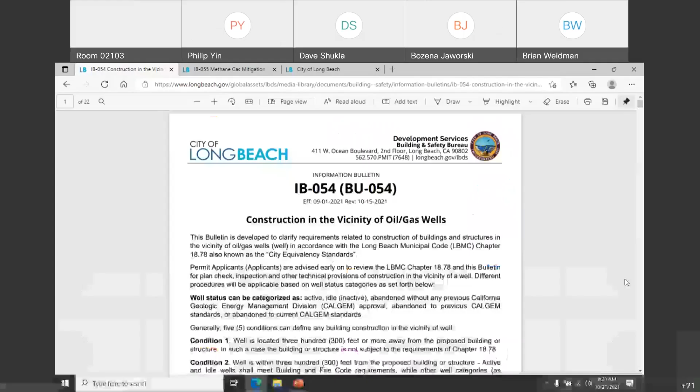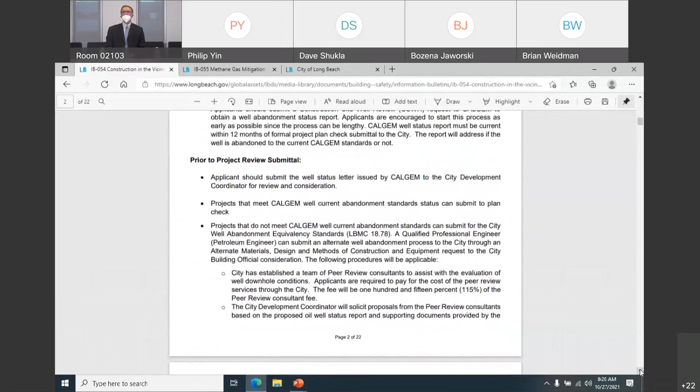For construction in the vicinity of oil wells, there is a cheat sheet, a simplified version of what the ordinance is all about. All the technical stuff that could not fit in the ordinance is detailed and put in bullet points, easy to read.

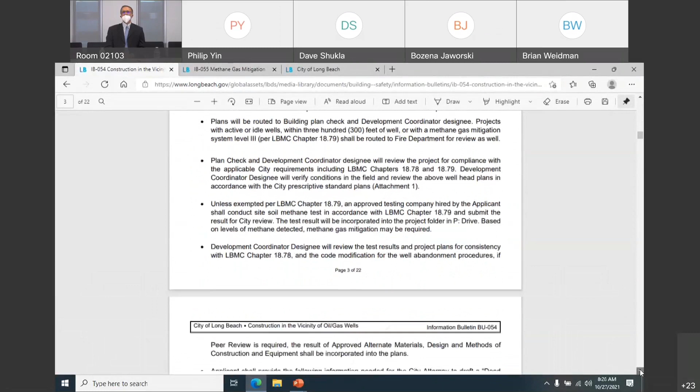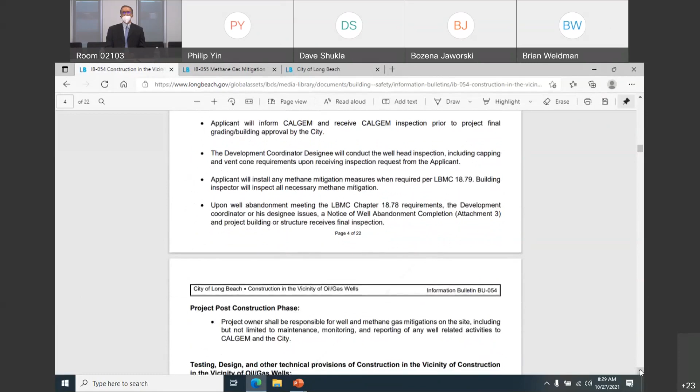Project review phase, what does it take? Project construction phase, what does it take? What is a pre-construction meeting all about? What do we expect to go through for inspection and post-construction? It's all spelled out in this bulletin, now readily available on the city website.

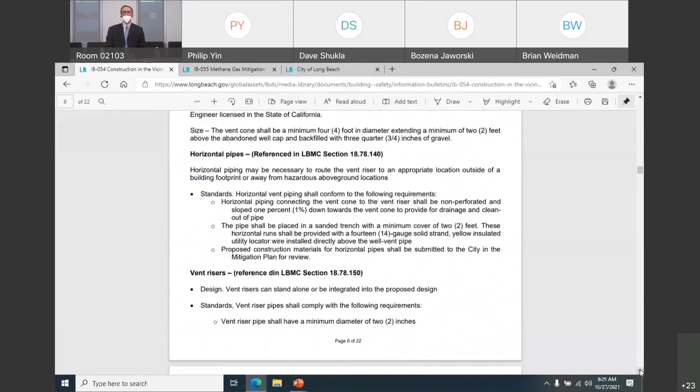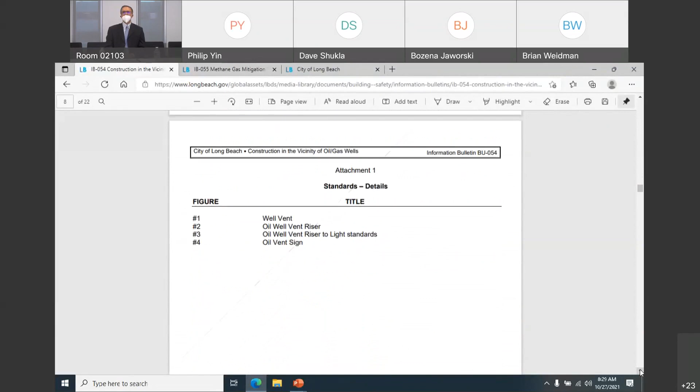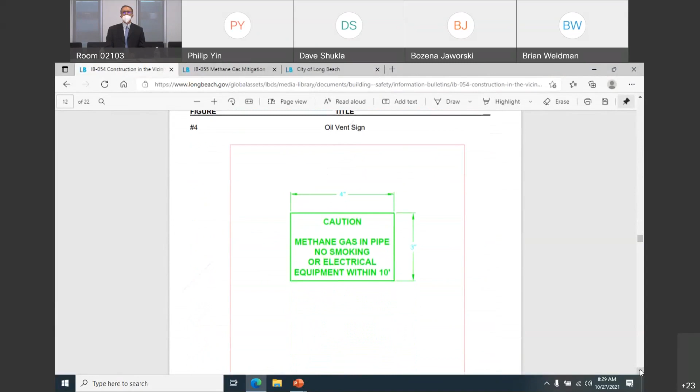For the development community to read and become familiar with, the bulletin also gets into some details about vent risers. It's a 22-page document with standard details that the inspection team will look for in the field, such as the cone venting of the pipe and vertical riser against building details. These are details that architects and engineers may have questions about and how to handle.

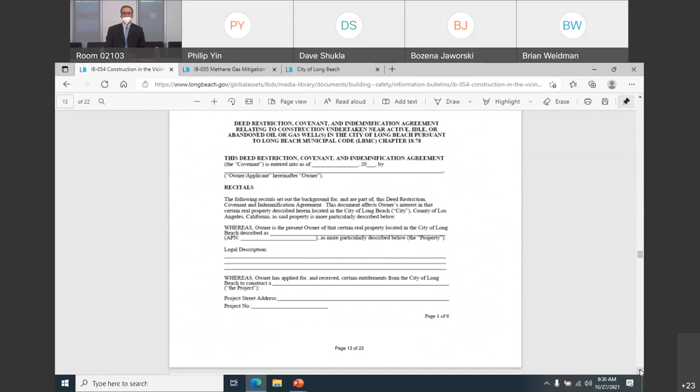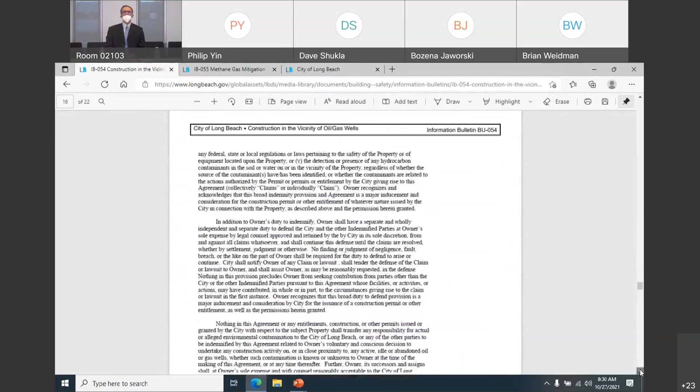Now they are prescriptively developed in this bulletin, and we highly encourage, even the signage, we highly encourage following these four details and including them in your drawings. Towards the end, there is a document we call indemnification and covenant. It's a combined document that, when a project is done and ready, the developer submits to the city attorney for blessing.

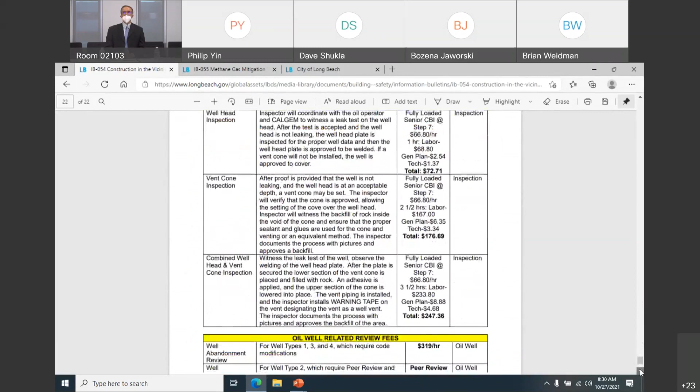It gets recorded on the title of the project and becomes a part of the project. So for future owners and future developers, and for protection of the citizens of Long Beach, this document is critical. When it's signed, sealed, and done, the city will send notice that the project was prepared properly and construction for the building can start. We also have fees listed on this bulletin for developers to anticipate or budget themselves for any aspects of their work.

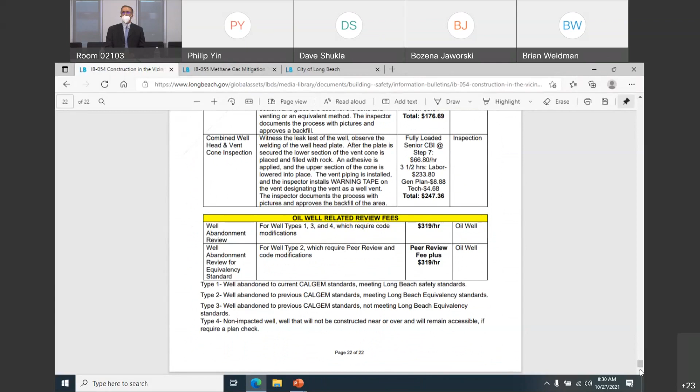If we can move to the next slide.

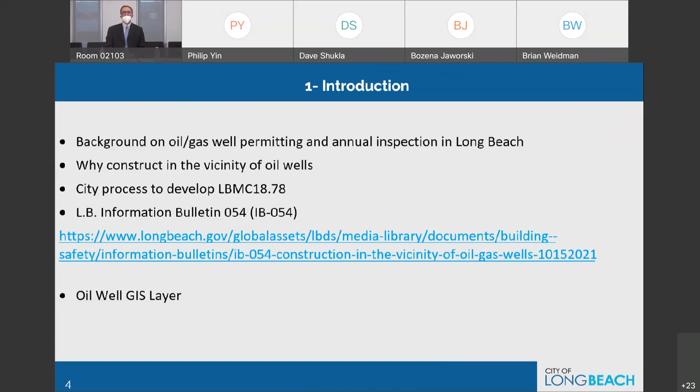At this junction, another big part of this process that we developed, which is very helpful to our staff as well as to the public and design community, and we want to make sure the design community and development community are familiar with this and use this public tool, is our GIS layer, the oil well GIS layer.

Can we move to the next slide? Jenna will explain the details about the GIS oil well layer in a few minutes. But before getting there, we've included this for our audience to hear and see what we are experiencing and how serious things can be.

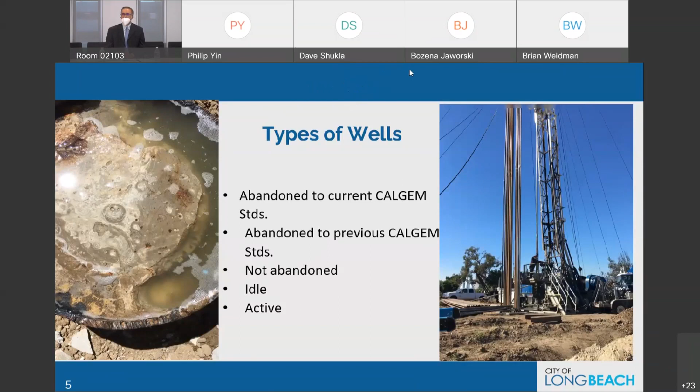We had to work with some developers to make construction happen in tandem, or in conjunction at the same time, as the wells around the projects were getting abandoned. So one of the points to deliver here for the development community: engage with us very early in your process and don't wait until the end. We can move to the next slide if we are ready.

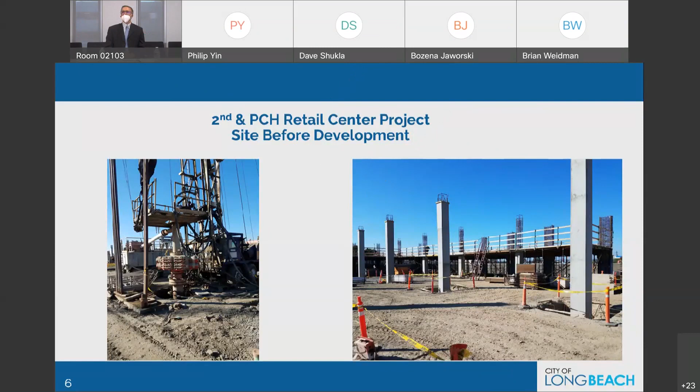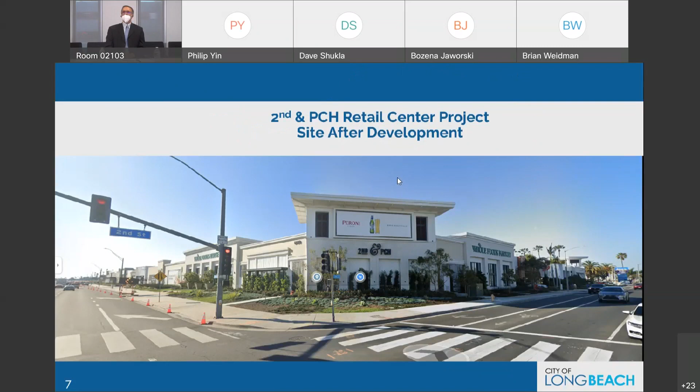So I'll be going over the web application, and I'm going to show you how you can turn on the oil wells layer so you can actually see where the wells are located within the city of Long Beach. As you can see, the link here is to the web application. This is also shown in the bulletin, and you can also access the web application through the city's website.

So could you please go to the city website? The city's website is www.longbeach.gov. At the home page, on the right side, there are different tabs. Third from the bottom, there's the planning and building tab. You want to click on this, and it directs you to the development services page.

At the top right, hover over the maps and you'll see the methane gas zone GIS map. Once you click on it, it'll open up a new tab and direct you to the web application.

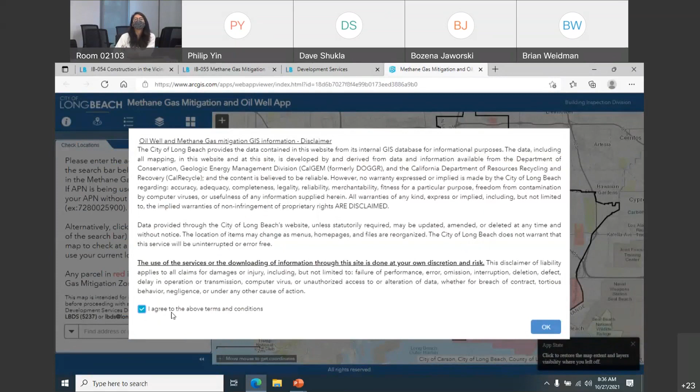The first thing you're going to see is the disclaimer, regarding the data that's being used within the web application and also the terms and conditions. You'll need to read the disclaimer, click on 'I agree to the above terms and conditions,' and press OK. Once you press OK, you have access to the application.

This is the methane gas mitigation and oil well app, and there are multiple purposes for this application. For this presentation, I'm going to do a quick overview of the application and how to turn on the well layer. In the next presentation, during the methane gas mitigation session, I'll go more in depth regarding the widgets, the different functionality, and how to use the search functionality. But for now, it's just going to be a quick overview.

To start off with, the majority of the application is the interactive map. This is where you're going to see all the GIS layers. On the left panel, there are different widgets from left to right. This is the About widget, which tells you about the description of what each icon does.

The second is the check location widget, where you can search for the locations you're interested in by address, APN, and coordinates. The third is the legend, to help you understand what these layers mean. The pinkish red you see here is the methane gas mitigation zone, and the black outline is the city boundary.

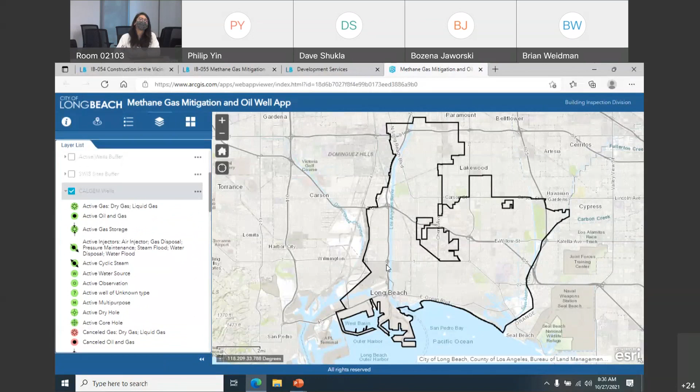What you'll need to do is click on the check mark next to it. As you can see, even though I checked it, it doesn't show on the map, because we have it configured so you have to zoom in to a specific extent for the wells to show up. So I'm going to zoom in.

Now that I've zoomed in, you can see the wells located on the map. You can check the layer list to see what these symbols mean, and you can also click on the well to see additional information that CalGEM offers.

Additionally, we also have the assessor parcels information in the background. If you want to look at the APN number and more information, you can just click on the parcel. For the well layers to turn on, it's under the layer list. Click the CalGEM wells and make sure you zoom in order for the well to pop up on the map.

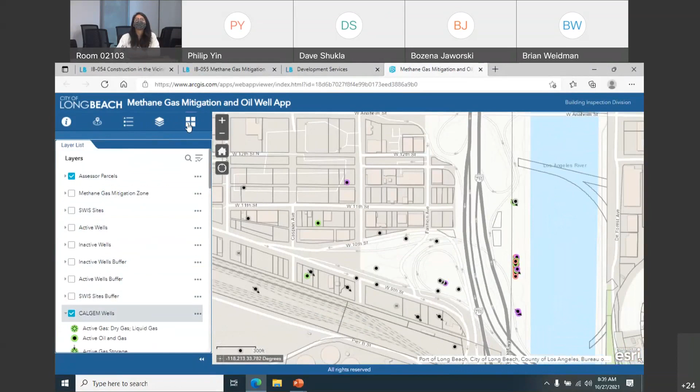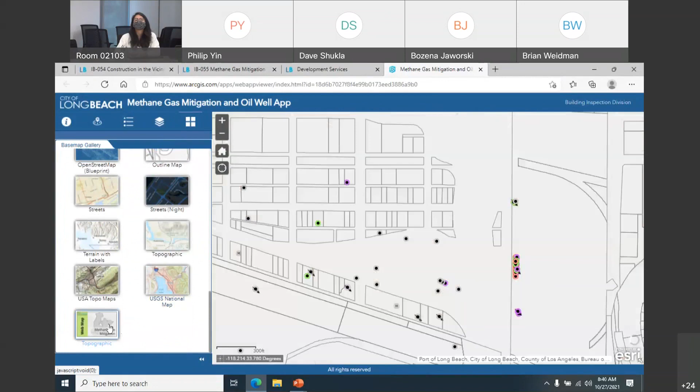Lastly, we have the base map where you can change the background of the map. You can do a dark gray canvas if you want, or you could also do imagery, or if you like the default extent, you can go back all the way to the bottom and there's a topographic option.

And that was a quick overview of the web application, and we're going to go back to the PowerPoint, where David will be talking about the next slide.

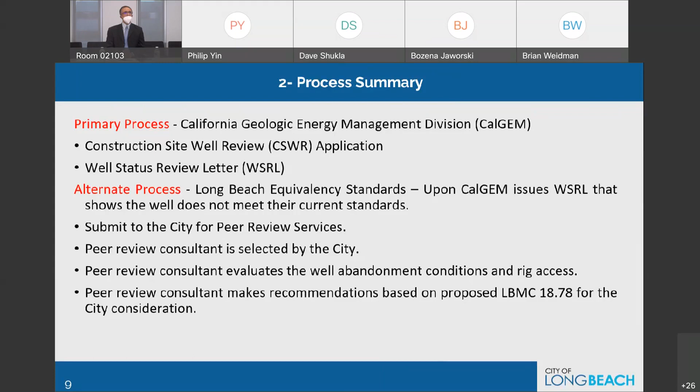So we have all that information, and then an application for a peer review gets submitted to the city. The city has a system of hiring peer review consultants who become our experts. These companies - I know a couple of them have joined this presentation and are listening at this time - they are our set of eyes and experts in the area. So whatever is proposed by the development community or developer goes through their microscope, goes through their reviews, and then they come back with their evaluation and suggestion to the city. That suggestion from the peer review is considered by my office. We can go to the next slide.

The ordinance refers to the city development coordinator or designee - that's basically the building official office and the staff that work with me. We will take the recommendation from the peer review company under consideration and make sure that the developer meets those standards as a minimum. If the developer meets those standards and agrees and pushes in getting those mitigation measures done in the field, then a qualified professional engineer hired by the developer, who needs to be a qualified petroleum engineer registered in the state of California with experience in oil well abandonment, will oversee the entire abandonment process in the field.

Sometimes they do that by means of using deputy inspectors, hired inspectors, or sometimes within their own staff. They make sure that all those plugs that were agreed upon, or all the mitigation measures, are put in place by the developer, and then at the end they certify the job.

The certification comes under the developer's liability and responsibility to the city, and it's upon them to verify things. We provide inspectors, go to the job site, continue to support the developer, and ultimately we receive that certification from a developer's engineer, which the ordinance refers to as a qualified professional engineer.

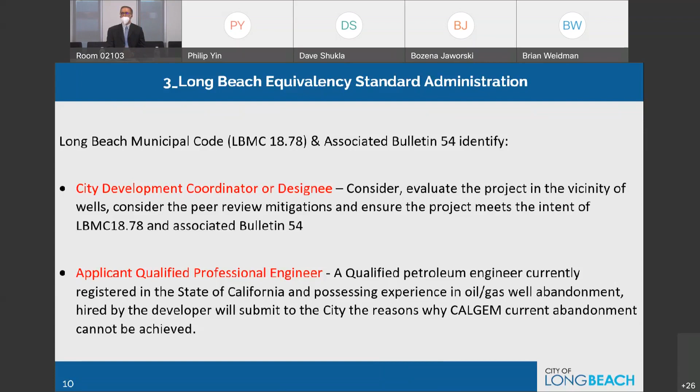Now, how do we know this? Well, in the construction site well review received from CalGEM, they describe the wells and status of the wells. So in the inspection process, it is required to verify the location of the wells.

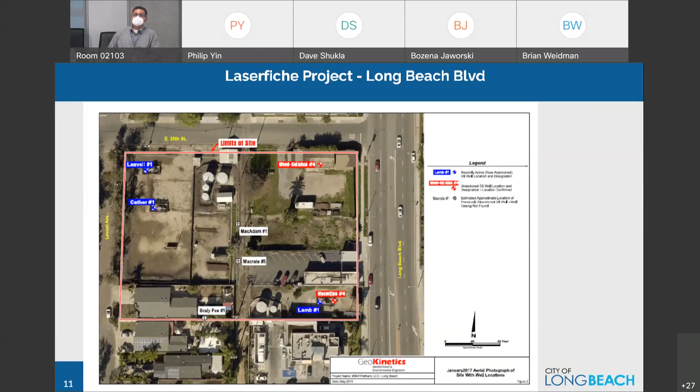One of the wells, in the middle of this parcel marked Macrate number 5, was found eventually and abandoned to the standards of CalGEM, previously known as DOGGR. And MacAdam, the well just above, was located under city utilities, so the qualified professional proposed a mitigation measure for this well since the utilities were in the way.

Can we move to the next slide? Okay, now this other picture shows the location of the proposed structures, an office building and an open garage, with some wells under the structure.

So interesting for this type of development, there is a requirement to uncover the wells and abandon them if not compliant to CalGEM standards, or city standards, which is equivalent to the CalGEM standards. We'll be going over the requirements of the abandonment process, and also how the vent cone will be installed and inspected, as we move through this training.

But for right now, I'd like to pay attention to the location of these wells. On the northwest corner, we see two wells. Right in front, on the north side of the proposed building, another well. And on the south side of those buildings, we're seeing 3 wells, which will require some sort of mitigation and also a venting system outside the footprint of the buildings, and we'll go over that.

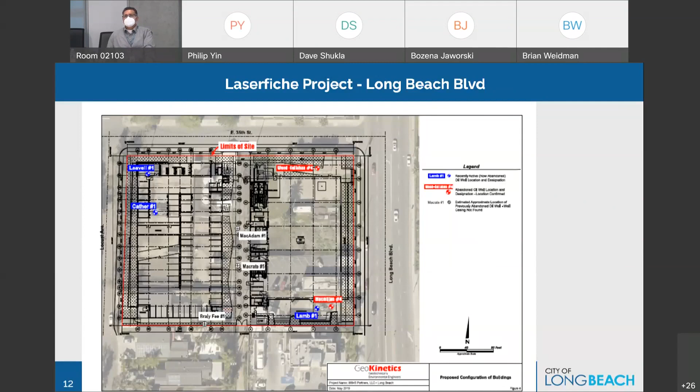Can we move to the next slide? Okay, so this slide in the inspection process is after the wells have been identified, permit is issued, and the vent cone system is installed.

We have 2 pictures. The picture on the right is showing the installation of a vent cone. This diagram shows the vent cone, the horizontal venting, and also the vertical riser termination up and off the roof of a structure. Pay attention to the vent cone, which is the grayish area, a sort of triangular shape.

Right under this cone there is a pipe. It looks greenish in color, which is vented to the outside, but right above, straight up, you'll see a black line that goes through some structures. The portion right above it, the whitish portion, those are blockouts that were proposed for this system.

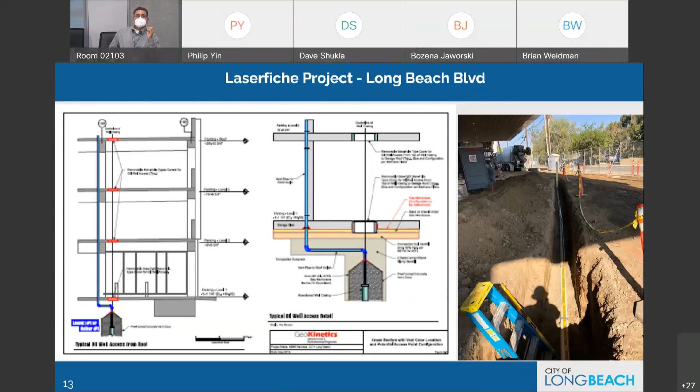Can we move to the next slide?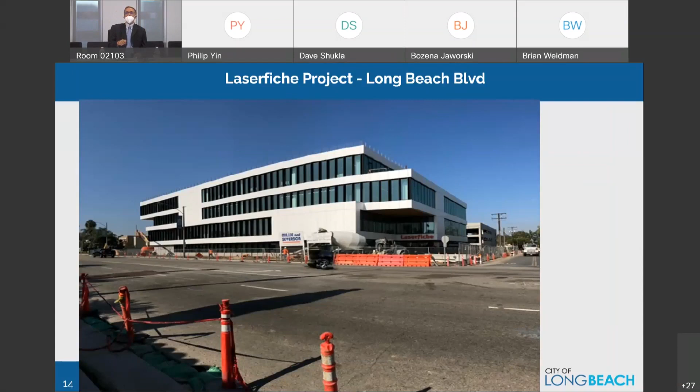And the third item is down the well, down the hole, the plugs that we are anticipating and looking for. Now we can go to the next slide.

Each well, as we will show, has a name and an ID, but has its own history, like any human being or any natural species. So when they were drilled, how they were abandoned, how they were left alone, whether they're still active—it's like an entity or individual with 100 years of history, each well. So we don't take it lightly.

Each well's profile information comes in and gets submitted to an expert. The expert reviews the report and develops their recommendation. It's very specialized work, so as a city we have to go to an expert to do that kind of evaluation for us, but we work in conjunction with the peer review expert. The developer pays for the cost of this review, and when the review comes in, it gets submitted to the developer for their consideration and implementation.

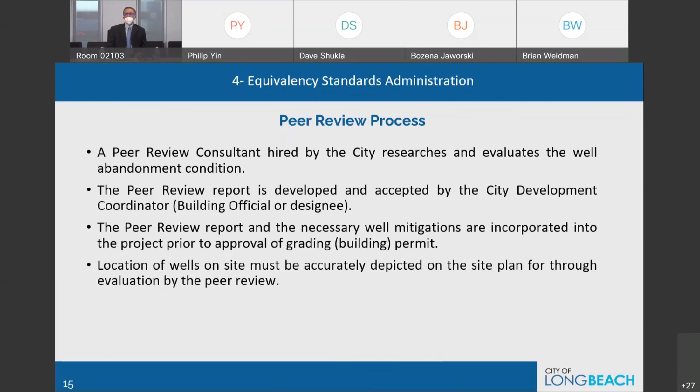We can move to the next.

Before the peer review is done, the city has office work to do. We have the application to process, create the folder, and authorize the peer review based on the city purchasing guidelines. It takes a little while to put that all in place for a project. Then the peer review consultant needs time to do their evaluation of the proposed mitigation.

Some projects may have 7 or 8 wells, so this takes time to really consider, and sometimes there's an interrelationship between these wells. Some are halfway abandoned, some are fully abandoned, some cannot be accessed. We get into the project at that time.

When the plan is in place, the project goes to construction, and the field review and field work starts. Zeke, his team, and our inspection group hold a pre-construction meeting in the field, explaining all the expectations and requirements for testing and monitoring of these wells. It all will be discussed.

Each oil well needs to be tested. There are procedures for testing, and the testing needs to happen under supervision of our building inspectors. The testing cannot happen just any time because of the details involved. For instance, we don't want testing done after the soil has been tossed around too much, or when it's windy, since we need accurate measurements from the equipment. There's a lot of concern about the testing and coming up with a correct result on each well.

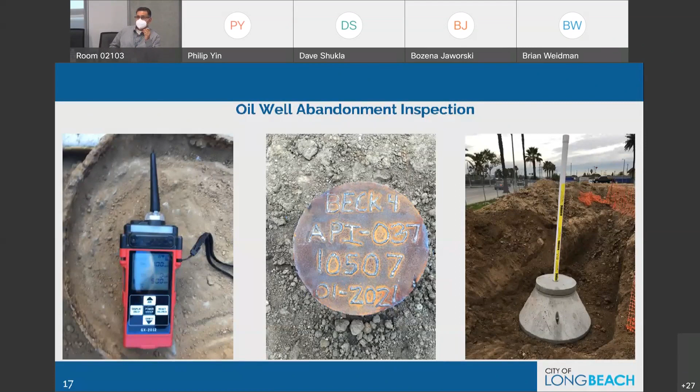Keep in mind this vent is temporary. It is just venting, waiting for any termination. It could be terminated horizontally, run to another location. In the rough grading phase or process, that's where it takes place, and then it gets covered after the inspection is conducted and passed. Now I'd like you to pay attention to the video and the process done when putting the lid and the gasket. All the components should comply with building and any other California codes. Go ahead and play the video.

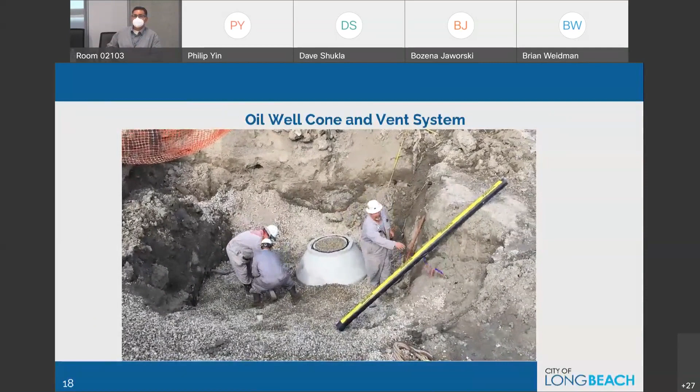Now this gentleman is putting a gasket over the vent cone. Inside the vent cone, we see what is required, it's 3/4 crushed rock or drainage gravel. It took 3 men to put the cone on, to put the vent on. The lid is made out of concrete and very heavy, so once they place it on it, it will squish the gasket and make a tight seal.

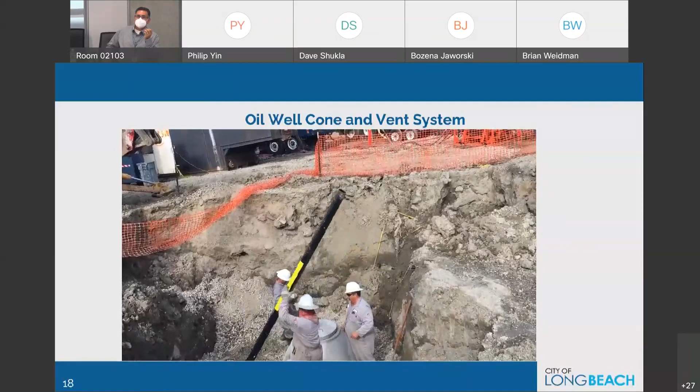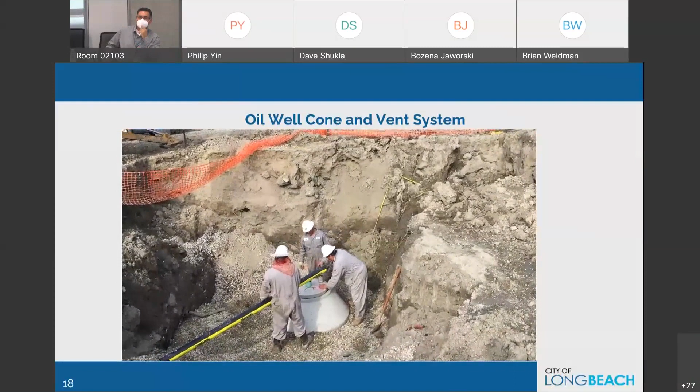Using approved materials, in this case plumbing materials, they are installing a Schedule 40 ABS pipe with the approved cement for that type of material. They are following the proper procedure, cleaning the pipe to remove any contaminants, any debris, any dust, so there is a tight seal when they place the pipe in the vent cone inlet.

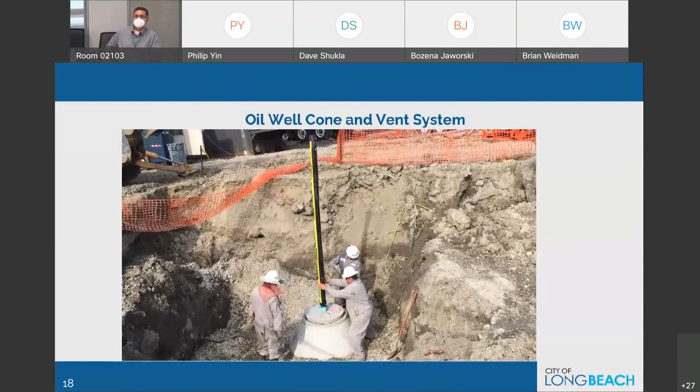When I saw the green pipe, maybe I thought, oh yeah, could be incompatible. But you know what, it's gonna work. There we go. If they were to use PVC piping, they would have to get an approved cement for that type of connection.

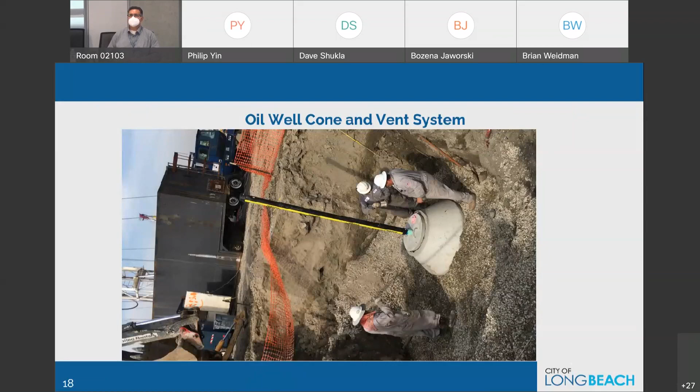From here, David, we go back to you. Oh, okay, I'm sorry, David, I made a mistake. So I'd like to show in these pictures.

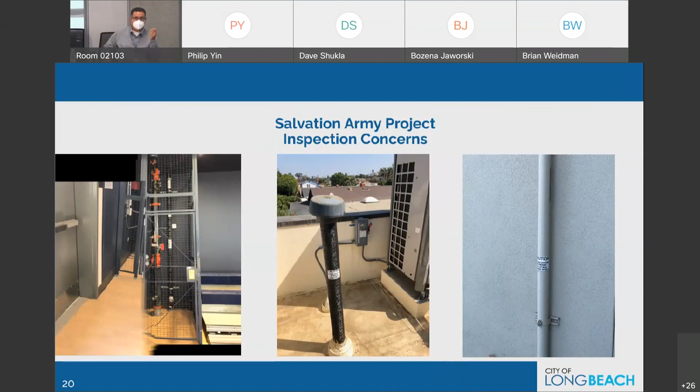Below well head mitigation: going through the CalGEM standard, having them review, providing the WSLR form — they accept or deny the abandonment — is mandatory for any process through the city. First, developers have to submit to CalGEM and receive this report, and they have to allocate time for this process because the state doesn't move very fast. One of the reasons we were asked to develop the equivalent standard was the state was becoming very expensive for projects, and projects did not pencil out because of the very rigorous process and bureaucratic system and everything else.

After the developer goes through that exercise and receives the form from CalGEM, evaluation of the well's existing condition will start with the city, and that requires looking at the plugs, the profile of the well, where the plugs are, how good each plug is — those minimum 3 plugs that I mentioned. And if, let's say, 1 plug is in and 2 plugs are missing, or some more mitigation has to happen, that needs to happen, and that takes time.